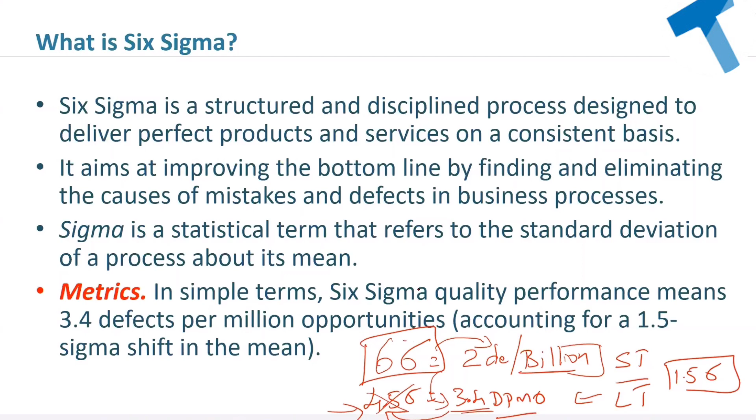I'm going to talk about this DMAIC a little later.

So a while back someone asked the question, what's the difference between QMS and Six Sigma? Now, QMS is a quality management system. Can someone tell me what is a system, in the chat box? We know what is quality, what is management, what is a system?

Yes, system is a set of processes. System is nothing but a collection of processes. So when we use the term quality management system, it's for the entire organization which uses a set of processes. But when we use Six Sigma, it is for a process. We are going to improve a process to Six Sigma efficiency.

So any process you take, what will happen? It will have inputs and it transforms the input into output, isn't it? So any process you take, it will have inputs, it will have outputs. This is the output. We try to achieve Six Sigma capability.

So the equation is y equals function of x, where y is the output and x's are the inputs. And that's what this equation is. So any process you take, it requires inputs and it produces output.

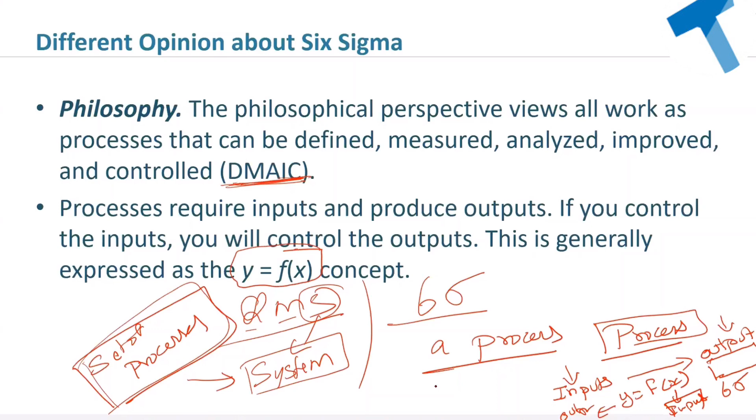What we are going to discuss today in today's class is specifically process capabilities — what is the capability of our process, what is the current capability of our process. Let me give an example, for you to understand simply.

Just imagine DMAIC, like you're trying to lose weight. So what you will mention in the define stage? Your goal — what you would like to achieve. What is the goal you're trying to achieve, how much weight you want to lose? Then what you will do — measure.

In measure, what you will do? You study the current weight — what are you currently. Then you analyze why you are overweight. Then you will try to make improvements, whatever it is, dieting, exercise, and so on. Then you try to control it.

Measure is a very important stage or phase, because in measure we try to understand what is our current capability, what is our baseline, where are we standing now. Only then, when you make the improvement, we know that a certain improvement has been made. So these are the two things we're going to discuss now: Six Sigma metrics and process capability analysis.

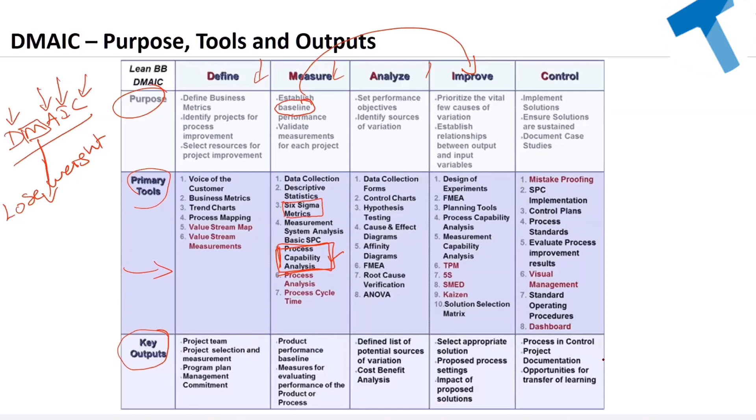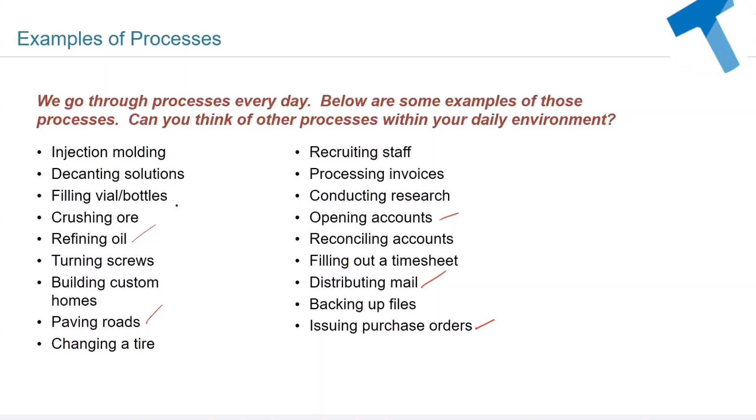So these are all examples of different types of processes a business performs, whether it's a manufacturing company, a bank, an insurance company, or a healthcare facility. Everywhere, Six Sigma can be applied. Anywhere there is a process, we can apply Six Sigma.

So in any process improvement endeavor, the ultimate objective is basically how we can perform the process better. How can we perform the process better? We have certain measurements available, such as DPU, DPMO, RTY, which we are going to calculate.

How can we perform the process faster? We're talking about cycle time, the amount of time it takes to complete a process.

The next one is how can we perform the process cheaper. Here we're talking about how we can reduce the defects, how we can reduce the rework, how we can reduce the cost of poor quality. So you can perform the process better, faster, and cheaper. Any Six Sigma project you take generally falls under any one of these or any combination of these metrics or goals.

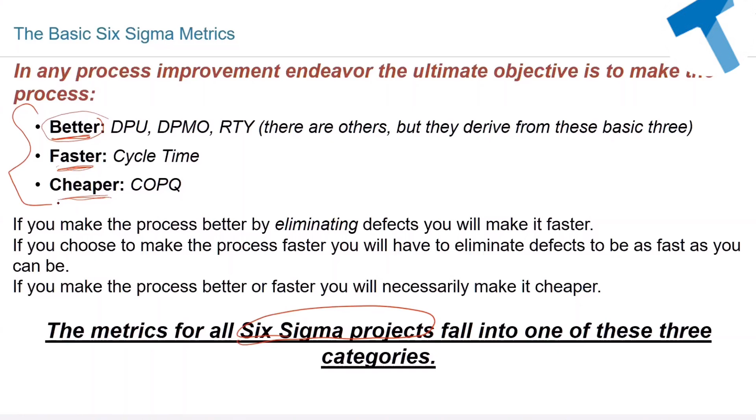So DMAIC stands for Define, Measure, Analyze, Improve, and Control. In Define, we will define the business opportunity - what is our goal, what are we trying to achieve.

In Measure, we try to understand our current state - where are we now. In Analyze, we try to determine the root cause of the problem. And in Improve, we try to eliminate waste, variations, defects, repairs, reworks, and so on. And Control, we try to sustain the result.

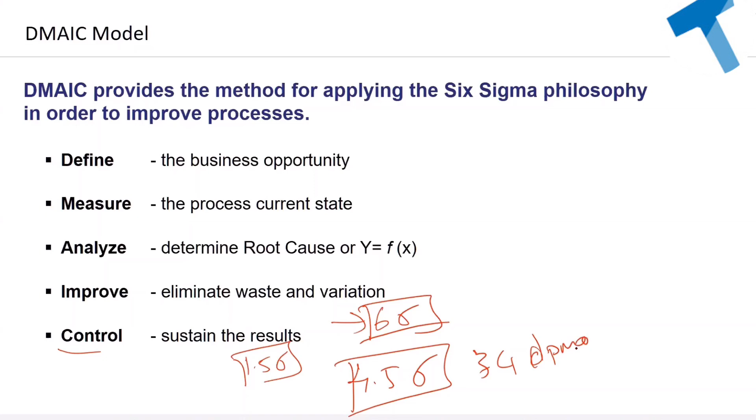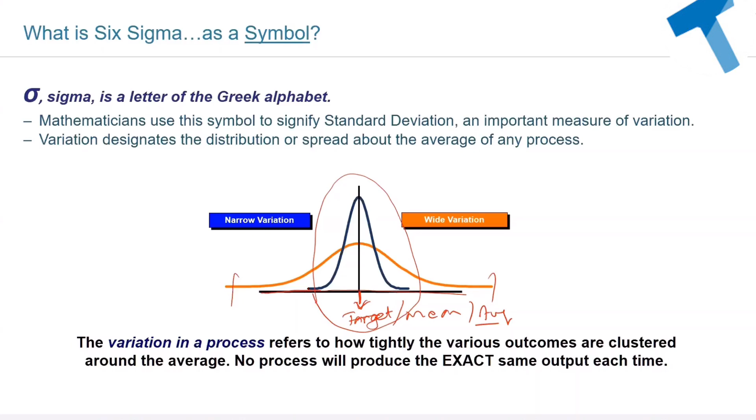Wider is a problem. Wider means you have more variation from the mean, which is your average. So wider variation is a problem, narrow variation is good. What we try to do in Six Sigma is achieve the narrow variation, try to bring the variation as close as possible to your process average, to your target value.

Okay, so what happens when you go away? For example, right in the middle is your process average - ideally it should be your target. So when your variation goes 1 sigma to the left and 1 sigma to the right, the total value which comes under it is 68%. In other words, 68% of the time your values fall between these two, minus 1 sigma to plus 1 sigma.

I'll talk about this in more detail a bit later. Now it might be a little difficult for you to comprehend. Then it is 2 sigma, then it is 3 sigma. Sometimes 3 sigma itself is very good, because if you notice here, 3 sigma is 99.73% conformance, only 0.3% non-conformance.

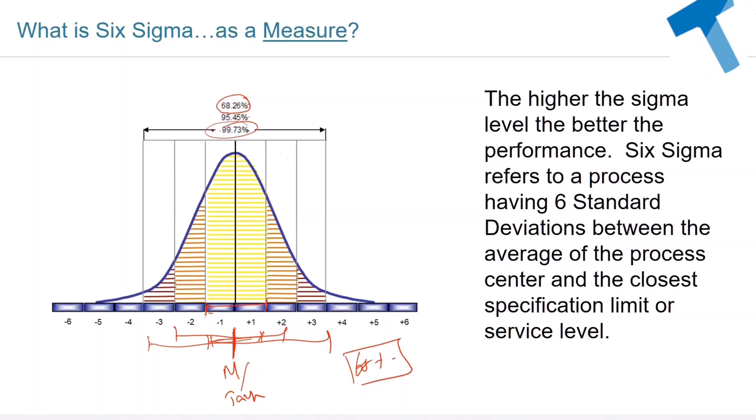But in certain industries, certain businesses, certain processes, it is not acceptable - we need to achieve 6 sigma. All right, more about this a bit later, not now. Again, not now, bit later.

All right, let's get into the calculations now. So in Six Sigma, we have many metrics. Now before I get into these formulas, let me quickly ask you a question, because you need to understand this fundamental when we talk about data.

Remember, Six Sigma is a data driven approach. Data can be broken down into two types: attribute data and variable data. So you need to know the difference between these two, what is an attribute and what is a variable data.

Let me ask you a question. How many participants are in this webinar right now? Is it attribute data or variable data? Type it in the chat box. How many students, how many participants right now? Is it attribute or variable?

Okay, good. Let me ask you another question. If I ask you to go out to your balcony or to the street and check how many people are crossing your road for the next one hour, is it attribute or variable?

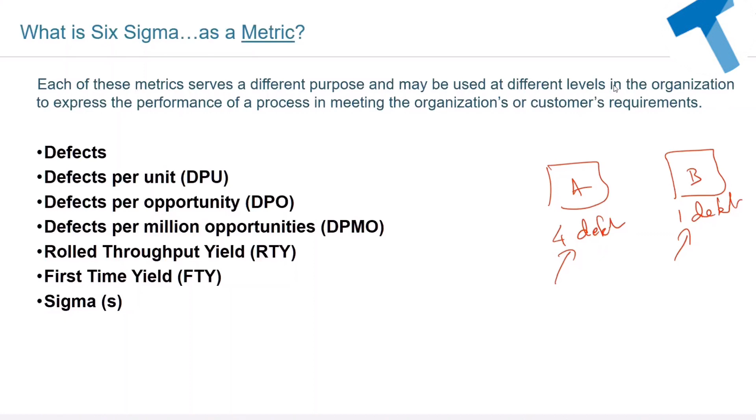So that's why we always talk about defects, not defectives. All right, great. Now let's go through one by one. Okay, let's quickly look at this slide. Okay, how good is Six Sigma?

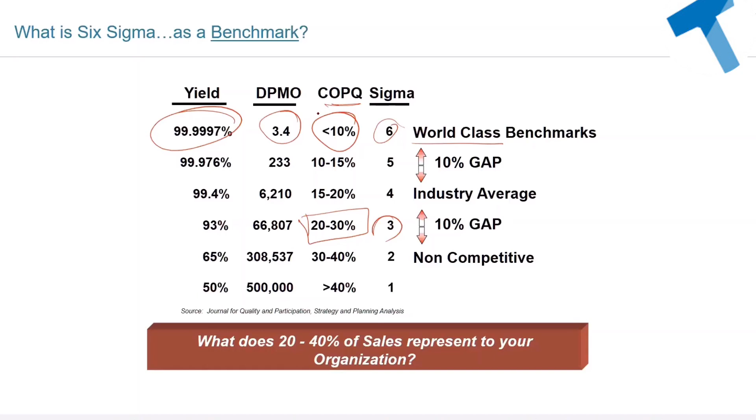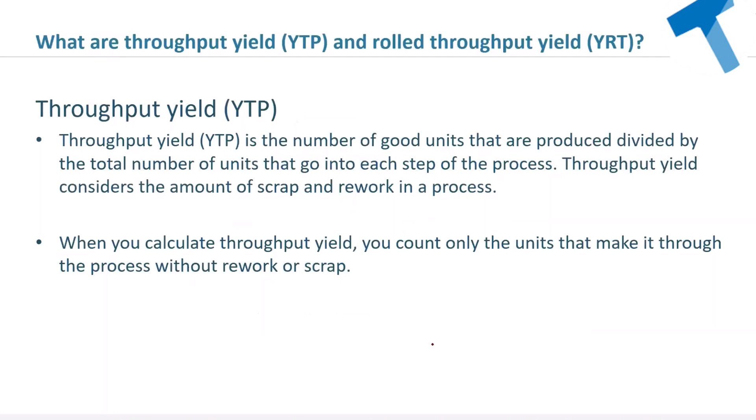Okay, all right, let's look at the first formula. The first formula is called throughput yield. It is in acronym, it is not TPY, but it is YTP, throughput yield. Okay, so what is throughput yield? How do we calculate it?

For example, you have a 3-step process for producing labels, like a label. The labels are first printed in a machine, then laminated, and then cut. So it's a 3-step process. You want to calculate throughput yield at each step of the process.

Again, this process has 3 steps. Step 1 is printing, step 2 is lamination, step 3 is cutting, which means each step will have input and output. For example, for printing, the input could be plain paper, the output would be printed paper. For lamination, the input will be printed paper, then the output will be laminated and printed paper. Then the input for cutting is laminated printed paper, and the output will be labels cut into pieces.

Now you want to calculate the throughput yield at each step of the process to know the overall throughput. That is called rolled throughput, which is the next slide. But here let's talk about it. For example, 1,000 labels go into the printing process, 950 of them are printed labels are acceptable. The rest 50 have some printing issues, some errors, which means your throughput yield for step 1 is 95%.

Got it? Okay, then 950 labels only go to the next step, lamination, right? Of which 800 come out properly, so the throughput yield is 84%, basically 800 over 950. Third step is 800 labels, which is output of the second step, goes to the cutting process, and 700 comes out. So the throughput yield is 88%, 700 over 800.

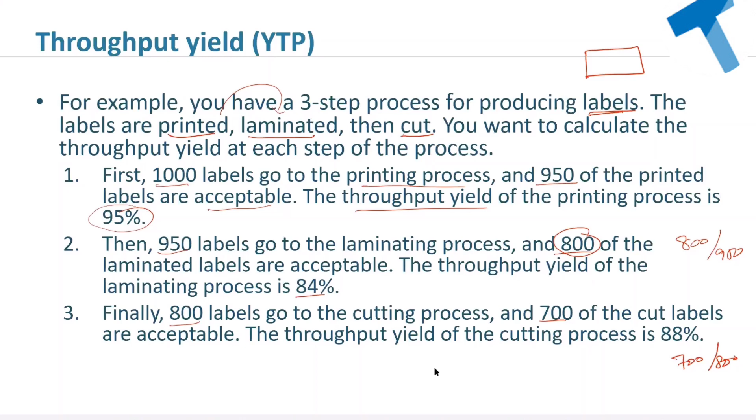Now that is the throughput yield for each step in a process. But what we are interested to know is the throughput for the entire process, isn't it? Because one by one doesn't give us any good idea, we want to know the entire process. And that is why it is called rolled throughput yield, which is basically multiplication of each step's throughput rate, then you'll get the final throughput. That is called rolled throughput yield.

Okay, which is 0.95 times 0.84 times 0.88. Okay, can someone use the calculator and check if this value is correct?

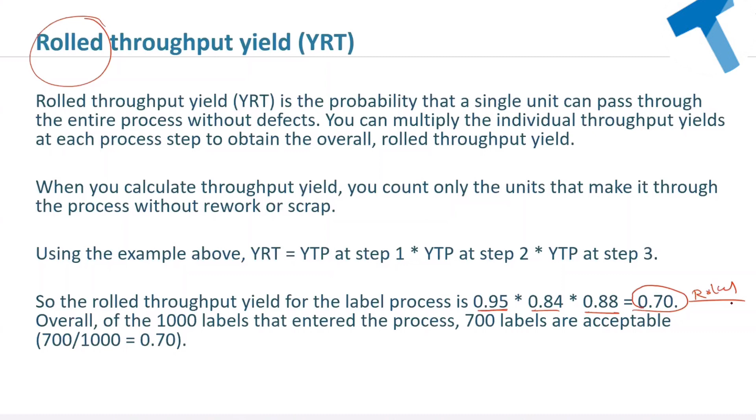Use your calculator and check if the value is correct. Yes. Okay, so 30% is non-conformance, damages or non-conformance, or you have to repair it, or you have to scrap it, and so on. So your throughput yield is 0.70.

Now let's calculate DPU, DPO, and DPMO, which is a good, interesting one. First one is called DPU, which stands for defects per unit. Next is DPO, defects per opportunity - a very interesting term we'll talk about. Next is DPMO, defects per million opportunity. Let's go through one by one.

The first one is DPU, which stands for defects per unit. So we need to know how many defects we are making per unit, per unit of production, per unit of output.

Let's look at this scenario - an example of calculating DPU. Your printing business prints custom stationery orders. Each order is considered a unit. 50 orders are randomly selected and inspected, and the following defects are found.

2 orders are incomplete. 1 order is both damaged and incorrect, which means this particular order has 2 defects. And 3 orders have typos. So totally how many defects do you have? 2 orders incomplete, 2 defects. 1 order both damaged and incorrect, that's 2, because you got 2 defects. 3 orders have typos, so 3 typos, 2 damages and incorrect.

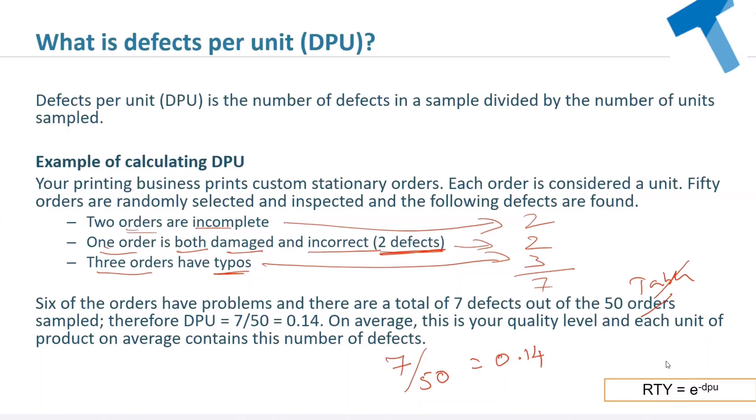Now look at this interesting formula. If you know the DPU, we can estimate the RTY, the rolled throughput yield. What is the formula for it? E, base log, to the power of minus DPU. So in your calculator, you put E to the power of minus - in this case, E to the power of minus 0.14. This will give us the rolled throughput yield. So there is another way to calculate the RTY.

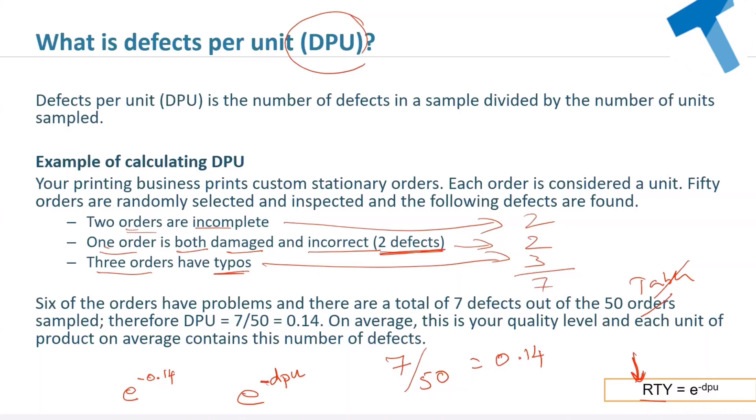Let me close it and come back. This is the interesting one - watch this carefully, because the DPMO, the key Six Sigma metric, is based on this. What we saw here was DPU, defects per units.

What we're going to see now is called defects per opportunity. What is defects per opportunity? Defects per opportunity is the number of defects in a sample divided by total number of defect opportunities. Okay, so watch this.

Hold on. Each custom stationery order could have 4 defects, which means when you process one unit of custom stationery order, there is a possibility of making 4 defects. What are the possibilities of making defects? Incorrect, typo, damaged, or incomplete.

When you receive one order, or when you produce one unit of whatever you're producing, there is a possibility of making 4 defects. So the total opportunity of producing one order or one unit is 4 defects. You have an opportunity to make 4 defects. Understand? So therefore each order has 4 opportunities.

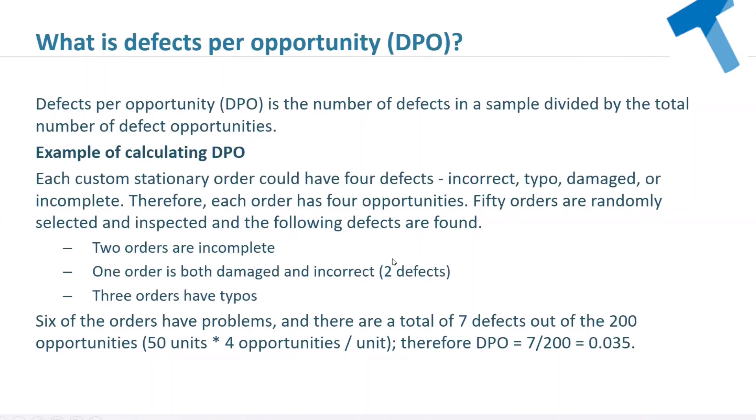Okay, moving on. All right, now this is very simple. This is defects per million opportunity. Since we already know what number of defects we are making per opportunity, finding per million opportunity is very simple. All you have to do is just multiply by 1 million. So DPO is calculating defect per opportunity, and per million opportunity is that multiplied by 1 million.

See if you can answer this now. Same question, but instead of asking DPO, it is asking DPMO.

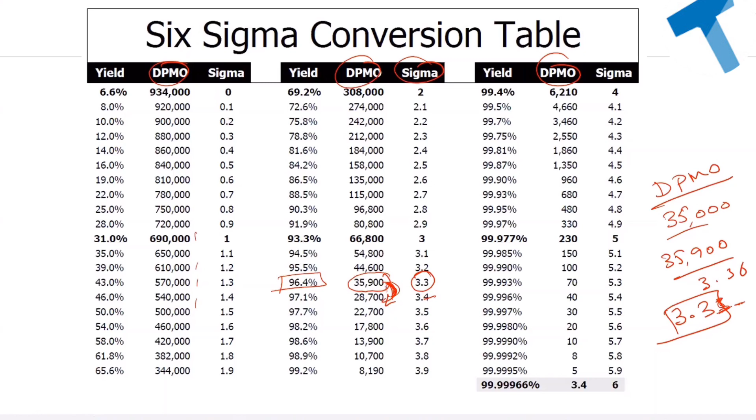All right, so what we discussed so far was mainly using the term defect, isn't it? Defect per unit, defect per opportunity, defect per million opportunity, even rolled throughput yield. We calculated how many input and how many output, how many of them are defects. So everything is based on defects - we are counting the number of defects.

Now, what if we are not counting it, we are measuring it using specification limits? So now we are talking about capability study using variable data. The moment we talk about variable data, then we will have something called lower specification limits and upper specification limits.

All right, for example, let's say you make a water bottle, and the water bottle capacity is, let's say, 500 ml - that's what you are labeling on the bottle, your capacity is 500 ml. Now, can someone tell me what can be the upper specification limit? What can be the lower specification limit, in the chat? For a 500 ml water bottle, what can be the upper, what can be the lower spec?

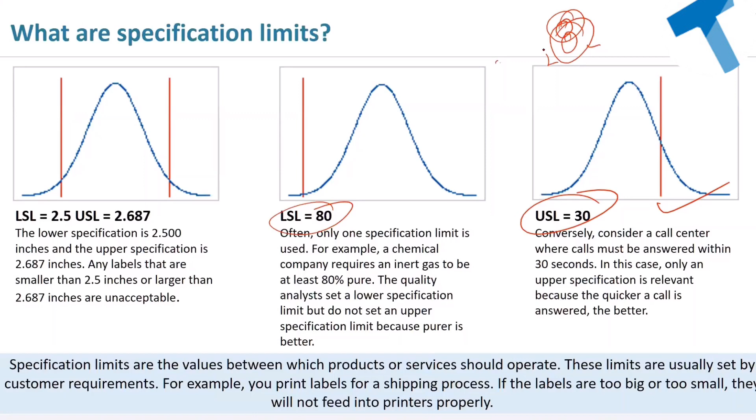I will not be going into detail, but control chart is basically a measure of the voice of the process - what your process is doing. Control chart tells you what your process is doing, how is it performing. It is called voice of the process.

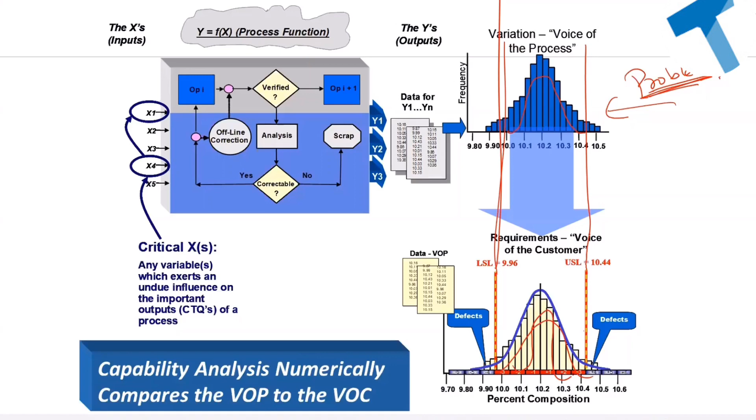Okay, let me talk about this one more time. Control limits are calculated from the process data. In other words, if you want to prepare control limits, you need to start the process, start production, measure the values, then you can plot the control limits and the control chart. But specification limits are defined by the customer even before you start the process. Specification limits and control limits are used for different purposes.

This is a very important point. Specification limits and control limits are used for different purposes. Control limits let you assess whether the process is stable, whether you're performing with little variation or too much variation. For example, when you start plotting data on a control chart, it tries to show whether these variations are stable or unstable. If any point goes outside the control limit, we say the process is out of control, it is not stable. So a control chart is a tool used to study process stability, whether the process is within control or not.

Specification limits are used to assess whether the process is capable of meeting customer requirements or not. That's the difference between specification limits and control limits. Control limits are used in control charts, while specification limits are used to assess the capability of the process using a formula, and that's what we're going to do. We are going to assess the capability of the process using a formula called CPK. Let me do that.

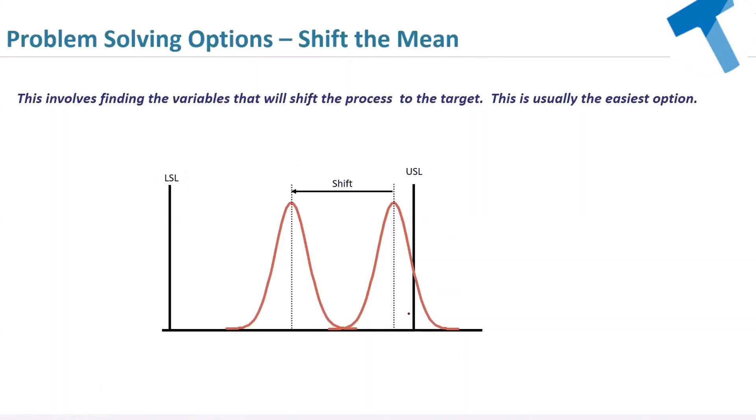For example, what's happening here? This is your lower spec, this is your upper spec. If your performance is here right now, this is your current performance. What you have to do is shift the mean, your average should be shifted. That is called shifting the mean. Usually this is an easy option to achieve, because there might be something you're doing wrong, and once you fix it, you completely come here.

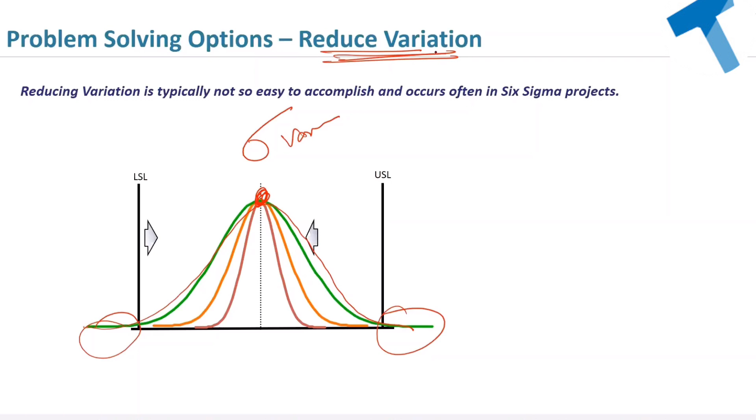Here what is happening is, let's say green is the current one. You are all over here. What we try to do, our average is fine, the problem is the variation is too much. So we have to reduce the variation. Reducing variation is not so easy. Moving the mean is easy, but reducing the variation is not easy. Trying to do both, shifting the mean as well as reducing the variation, usually happens in Six Sigma projects.

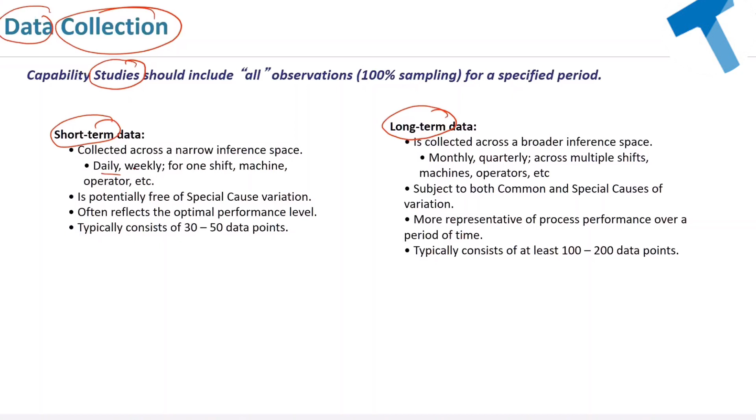Just one more formula and I'm done. When you do the process capability study, how about data collection? How long or how far should we collect the data? Data can be collected over a short term or long term period. Short term is usually within a week, within a day, within a shift. Usually 30 to 50 data points is enough.

But if you're going to do it for a long period of time, which is better but not always possible, then we're talking about at least 100 to 200 data point samples you have to collect, and we need to process it in the formula.

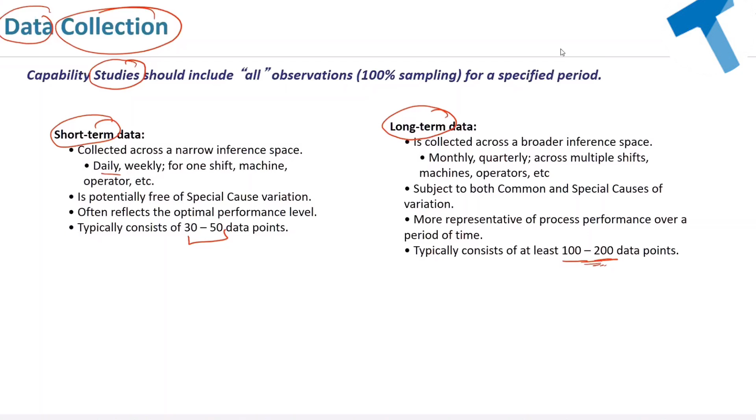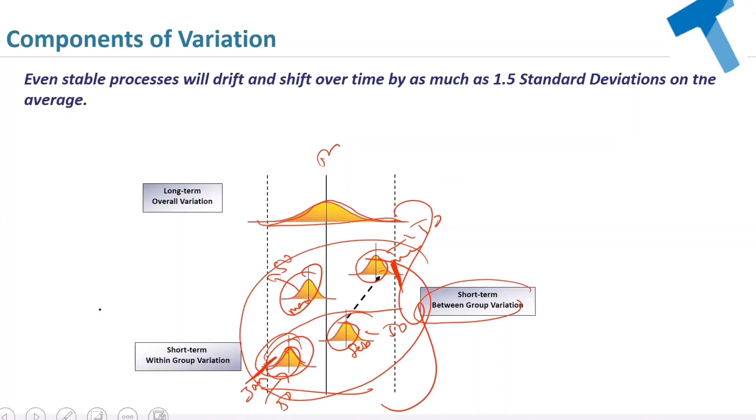For this very reason, when I measure my sigma here, I might achieve 6 sigma in one spot, but that's not a great example overall. I might achieve 4 sigma here, 5 sigma here, 4.5 sigma here, or 3 sigma here. So for example, in the month of April I achieved 6 sigma. There is no guarantee that 6 sigma is going to continue. Maybe in the month of June I might go back to 3 sigma, or 4 sigma, or 3.5 sigma.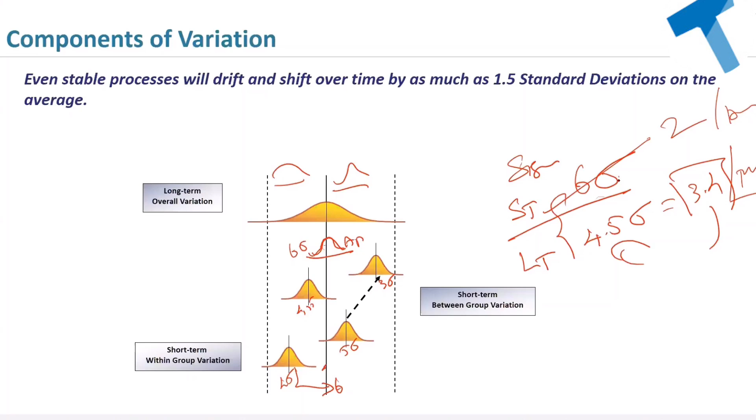So that is why whenever you measure your sigma capability, even though you achieve 6 sigma in the short term, in the long term we can possibly drift, so we might only be able to achieve 4.5 sigma. This is the reason why, even though you achieve 6 sigma, you're actually disclosing only 3.4 defects per million, which belongs to 4.5 sigma. In reality you might have achieved 2 out of a billion, but what we're disclosing is 3.4 defects per million. So this 1.5 room for error is because of this reason.

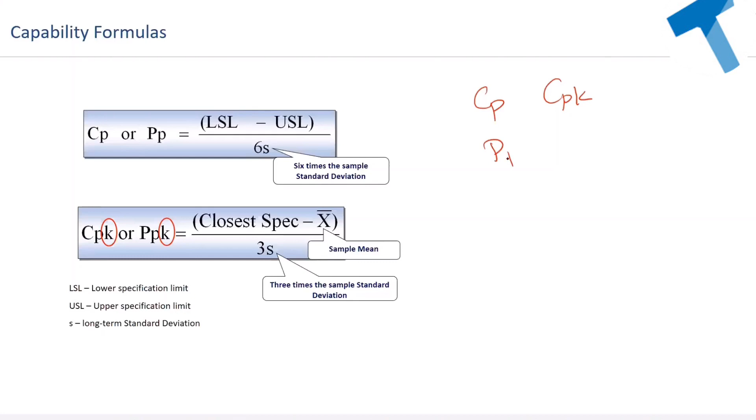There are many formulas available: CP, CPK, PP, PPK. These two formulas are for short term, these two formulas are for long term. Usually we don't do long term, but if you want, you can. We do short term because we collect the data and try to measure it. CP has a lot of issues, so we will not cover CP now. I will keep a separate webinar only for CP, CPK, PP, PPK with a lot of examples.

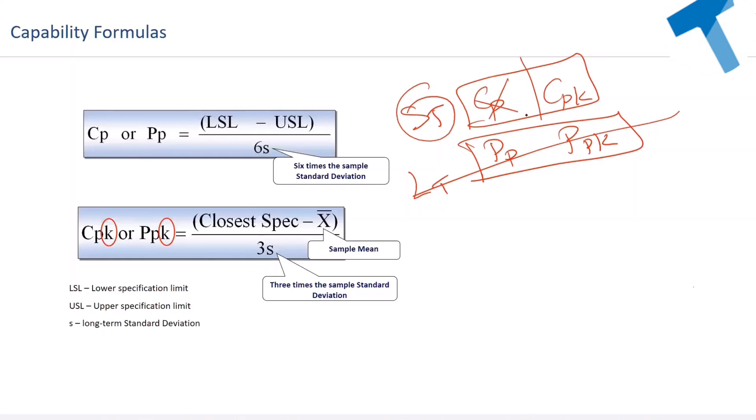Okay, I'm trying to explain so many things in a single webinar, it could be overwhelming. Let's do the CPK now.

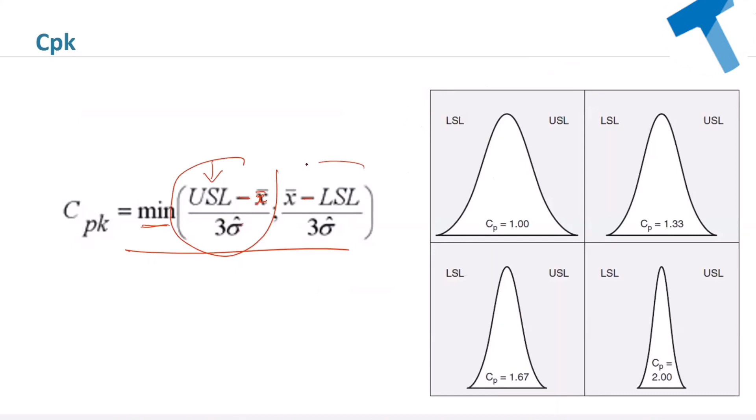CPK has a special formula: minimum of upper specification limit minus your average, or average minus lower specification limit, divided by 3 sigma. We have to calculate this and take the minimum of these two.

Watch this. Your normally distributed process has a mean of 28.5. You're producing cookies, and you collected samples from 500 cookies over a week or a day of production. You found the average cookie weight is 28.5 grams, and you calculate the standard deviation to be 2.4. Your lower specification limit is 19, and upper specification limit is 39.

If my CPK is 1.32, what does it mean? Remember, when my DPMO is 35,000, it means I'm operating at 3.3 sigma. Similarly, if my CPK is 1.32, what does it mean?

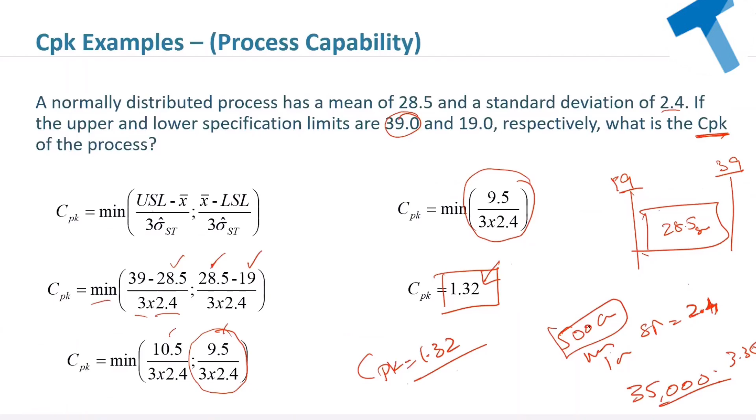Again, we have a table for this. What is my CPK? 1.32. Where is 1.32 on the CPK table? 1.3, 1.33 - so 1.32 is somewhere here. Which means I'm operating at how many sigma? 4 sigma. I'm operating at 4 sigma.

This is called the CPK conversion table. What we saw before was the DPMO conversion table - this is the CPK conversion table. There are tables available for it. So if you're operating at 1.33 CPK, your sigma level is 4 sigma. And if you want to convert that into parts per million or defects per million, it will be only 63. So you're producing only 63 defects out of a million.

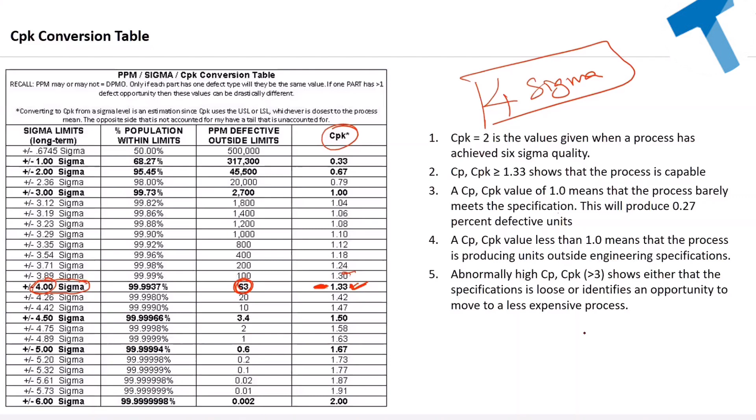Abhishek is asking what's the sample size for CP and PP. I just told you the sample size is 30 to 50 for CP, CPK, and around 200 for PP, PPK. But there is no rule, no standard available for it. It's just a matter of different gurus and statisticians coming up with their own way of doing it.

So the recommendation for an existing process, if the process already exists, is 1.33. If it's a new process you're designing, it is 1.50. If the process is safety-related or critical, then 1.5 for an existing process, 1.67 for a new process. These are all just recommendations - again, no standard says about it.

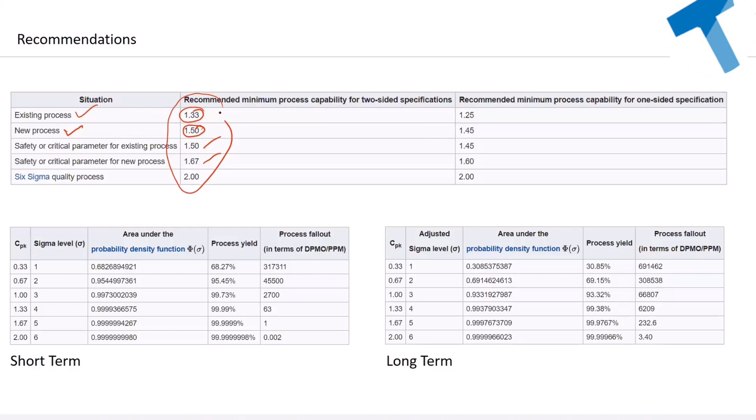CPK means process capability index. Watch this: short-term sigma versus long-term sigma. If your CPK is 2, your sigma is 6. Remember, sigma means the possibility per million non-conformance is 0.002, which is 2 per billion. But even though we achieve 6 sigma in the short term, we disclose 6 sigma in the long term as 3.4, which accounts for a 1.5 sigma shift, so this is basically 4.5 sigma.

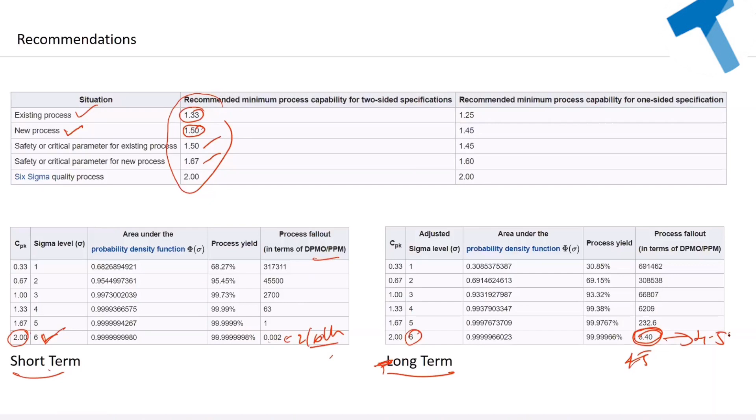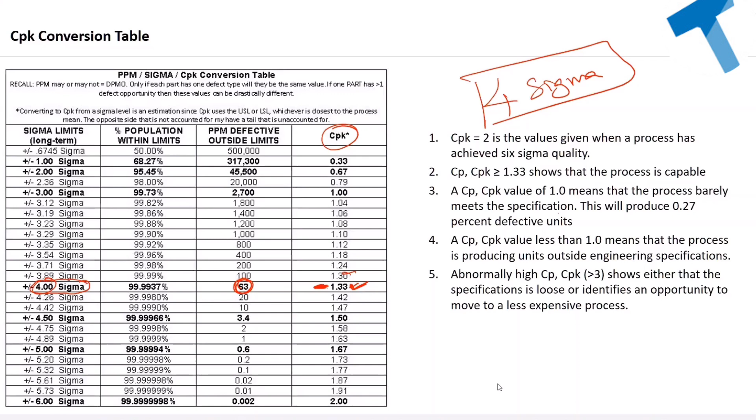Now, I know that CP, CPK, PP, PPK is a big topic. I just want to give an introduction to it. I will do a separate webinar on CP, CPK, PP, PPK. There is also something called CPM - it's by itself a huge topic, with upper spec, lower spec, and all these things.

If you want to become certified, there are different levels of Six Sigma available - for example, yellow belt, green belt, black belt, master black belt. I personally recommend no other certification body other than ASQ. They are the leading certification body, but there are many available in the market. The best one is ASQ, American Society for Quality.

And for different belts, the requirements are different. Usually any general work experience is enough. If you want to become yellow belt or green belt, general work experience is enough. But if you want to become black belt, you should have worked in a Six Sigma project - you should have experience working in a Six Sigma project.

If not, the recommendation is to do the green belt, then do a Six Sigma project, then do the black belt. Master black belt is for full-time professionals who should have done at least 10 Six Sigma projects. But before you go to black, you start with green. Usually 3-4 years of general work experience is enough, nothing specific. In my training, I have dentists and doctors sitting in my class because they own a clinic. Black belt means you should complete 1 Six Sigma project, and keep in mind, a Six Sigma project is not too elaborate or too long.

It usually depends on the size of the process you're selecting. If a doctor who owns a clinic tries to reduce patient waiting time for a small clinic, he might be able to complete the Six Sigma project in a matter of a week or 10 days. That's enough for him to have 1 Six Sigma project experience, and then he can apply for a black belt.